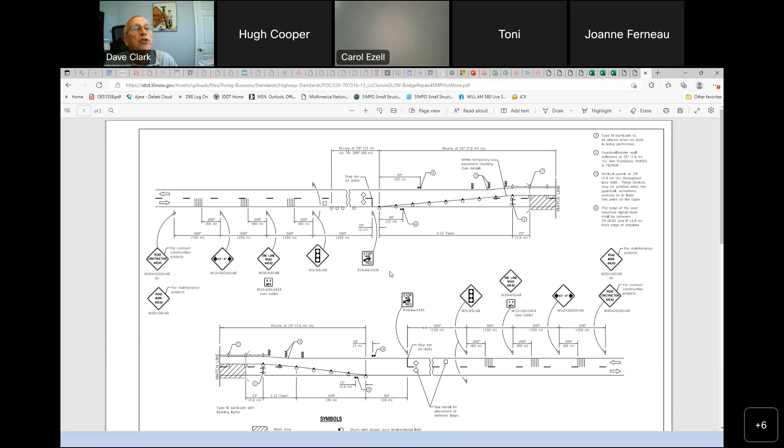Work with the RE on the project in advance on where those are going to be set. A lot of times they're going to go ahead and mark those out where they want them, where they want that taper to be, and so forth. But just keep in mind, here's kind of what those things look like. In this case, there's also signals that you may need. So there's a lot of different things that can be involved with traffic control. Just keep that in mind, and make sure you have the right standard for the work that you're performing.

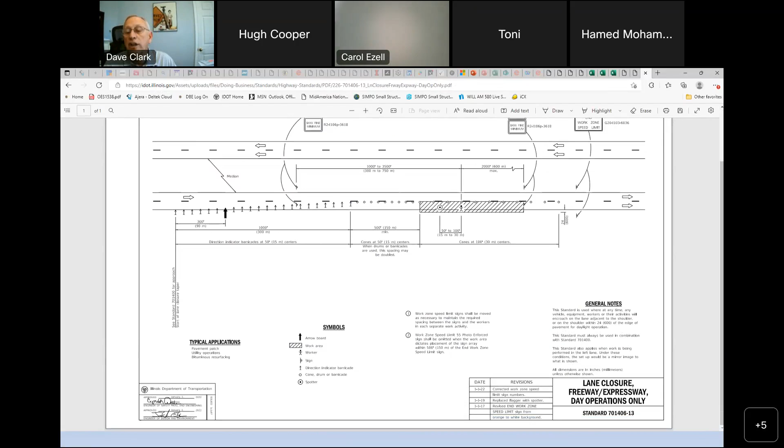Act like that every time. Let's just look at one on a freeway. This would be, as I scroll down, you'll see, this is a lane closure, day operation only, so not for nighttime. You're just closing down a lane, you've got a work zone. Maybe this is some kind of a patching repair that's only for daytime, where you're going in, removing the patch, filling it, and opening it up that very same day. Here again, it's going to give you your locations of your signs, your taper lengths, all those kinds of things.

Keep in mind, there are these symbols down here. It talks about arrow boards where the work zone is. They've also, over the years, added things. You'll see that they change, make revisions from time to time. The last revision here was made January 1, 2022, just this past January. I don't know exactly what all they added here, but one thing I do note that it's new.

They show a little stick man in here that you've got workers in the work zone, and then you have what they call a spotter. Now this may be a flagger, but it's somebody kind of basically a spotter for the workers there. They're watching the traffic, making sure nobody comes flying through some of the barrels and barricades and starts to enter the work zone. So they're to be watching for that, warning the workers, making sure that there's no accidents that would happen. So that's kind of one of the ones there.

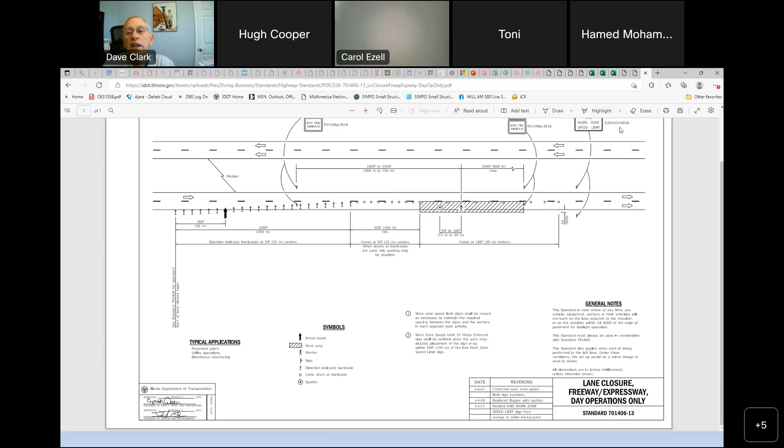Let's look at the one down here for sidewalks. I went past it. Now let's look at an urban one.

Let's look at a 2-lane. So here's an urban one, all one direction. So kind of, what lanes closed, barricades, workers. You've got the little dot here, that's your flagger that you're going to have. So just a little bit different. Since this is one lane, you don't have signs in both directions.

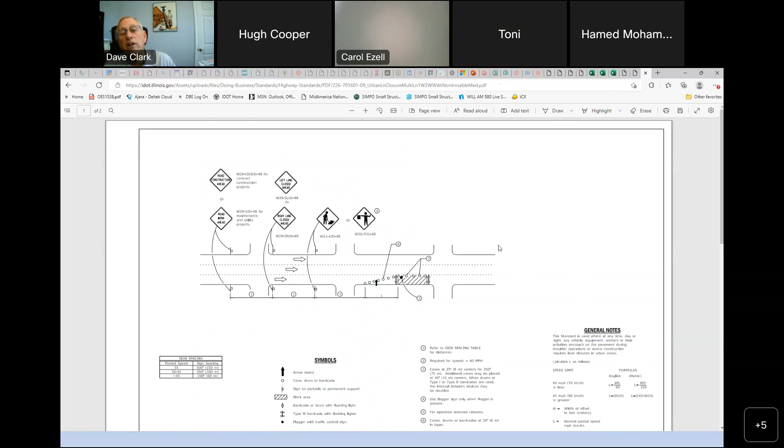I'll go back and pick one of the others down there. I wish this would just go right back to where you're at, but it doesn't. So here's one that's a multi-lane urban situation.

You've got a bi-directional turn lane in the center. So this is kind of showing how you handle that when you're working there. You're going to be basically closing off 3 lanes, that center bi-directional turn lane and the 2 adjacent lanes, and funneling everybody down to 1 lane. But then you can see the difference where you have signs in each direction. And I'll emphasize again, spacing, they'll show spacing here, but that could vary just depending on what's there. There's just a lot of things in an urban area, signs, power poles, things like that. And you just don't want anything hiding any of the signs that you're putting up.

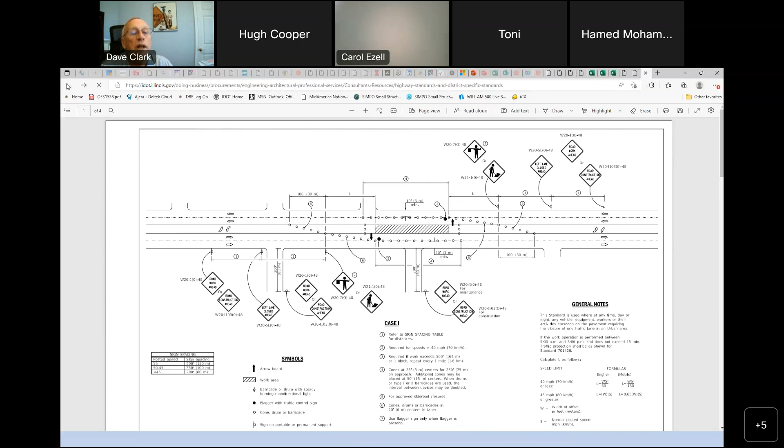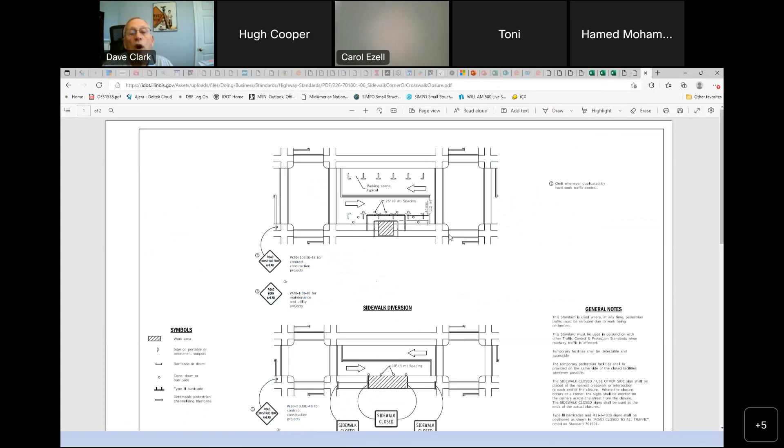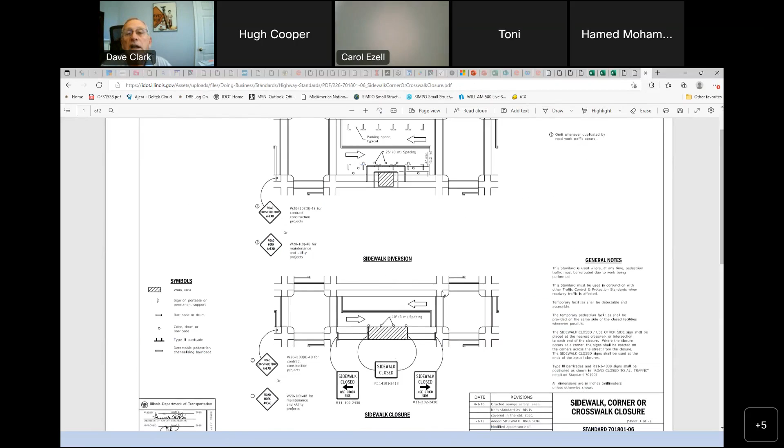All right, we'll go back and look quickly at that one for sidewalk, because I know there's a lot of DBEs that do sidewalk work. So here's an example, one of those where we're actually doing work on a sidewalk here. So people can't walk and go through here, same way as what's shown down here. There's going to be signs that say sidewalk closed. You're going to put a sign down here at the intersection, having them go across to the other side and use the sidewalk on the other side. So just keep in mind, you have that kind of thing for sidewalks also, especially in those urban areas.

What I want to also note here, we talked about this is a 700 section. The 701 is basically all your traffic control kind of things. There's one just for different traffic control devices, but there's still other 700 section things here. I'm just going to highlight those.

Most of these are your traffic temporary concrete barrier that may be needed, different sign panel details, how to erect them, the posts to be used, different reflectors, and things like that. It also talks about pavement markings, curb reflectors, and guardrail reflectors. You may be a guardrail contractor putting in guardrail, but it's a different standard for the reflectors that go on that guardrail, so here's where you'd find that.

Guardrail itself, though, is a 630 number, and those are up in this area. It talks about the different kinds of guardrail end sections and so forth. So just keep in mind anything that has to do with reflectors, pavement markings, signs, and things like that is going to be found in that 700 section.